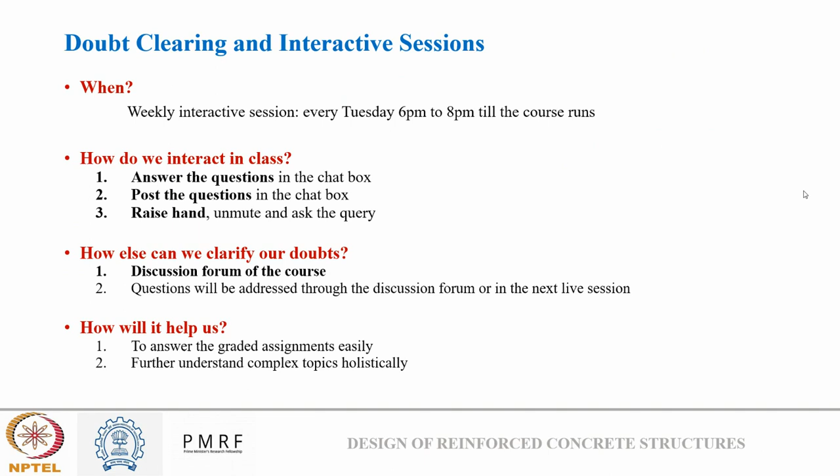Now, in today's session, we will first have a quick glance at what we discussed in the last live session, which was for week 3 of this course. Then we'll discuss week 4 content, starting with a quick overview of design of flanged sections, followed by a numerical on flanged sections. After that, we'll start our discussion on limit state of collapse in shear. We will first discuss the basics of flexure and shear failure, how stirrups are considered, and how designing of shear reinforcement is done. In today's class, we will see around 4 to 5 numericals, since that will provide you better clarity of applying the codal provisions. Finally, we will conclude the week.

So, in the last live session of mine, we first talked about limit state of collapse in flexure, where we discussed how a singly reinforced beam is designed. We looked at the stress versus strain plot, material behavior, derivation of relations, and one numerical.

We then talked about design versus analysis. Design is done when we know the external load and moment acting on a section, and we want to design the depth of section and the reinforcing area required. Analysis is done when we know all the parameters of a section and we want to calculate the moment capacity of the section.

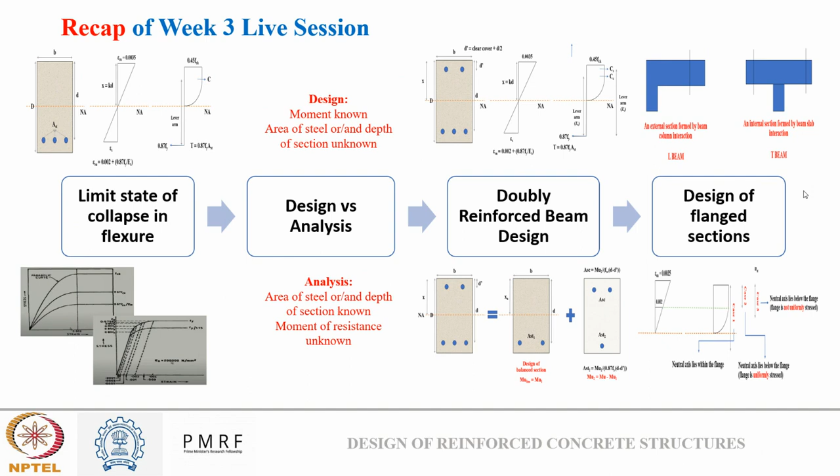Finally, we discussed flanged sections. What are those? What are the different cases in terms of design in flanged sections, and a general flow of design? So, just to recap before looking into a numerical: what are flanged sections? These are sections formed by a combination of two or more individual components. You can see in the first image it is an L beam formed due to the interaction of a column and a beam at the external joint. The second image shows a T beam formed due to the interaction of a slab and a beam.

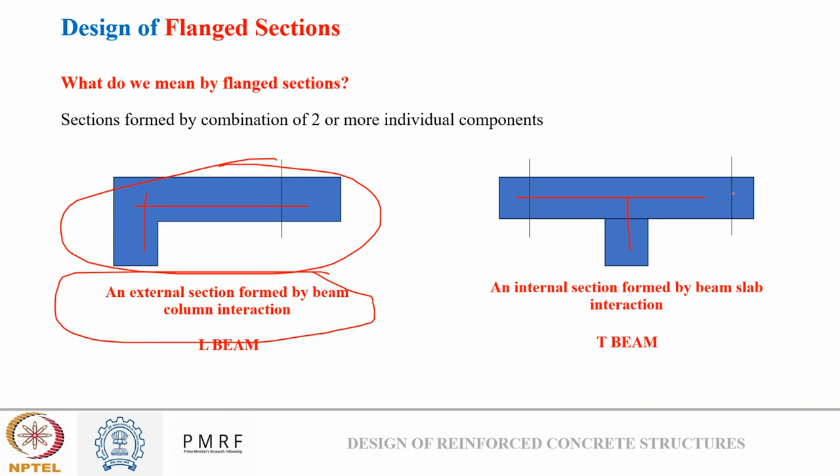Now, based on the stress block, flanged section design can be divided into three cases. Case 1, when the neutral axis lies within the flange. Case 2, when the neutral axis lies below the flange but the flange is uniformly stressed. And case 3, when the neutral axis lies below the flange and the flange is not uniformly stressed.

Now, how do we judge which of these cases we need to deal with? We get that judgment by getting the value of x, the depth of neutral axis, df, and d. Assuming Fe415 grade steel for now, we can calculate df by d value using the similar triangle property, and by clubbing everything together based on this df by d value and x value, we can judge which case we belong to.

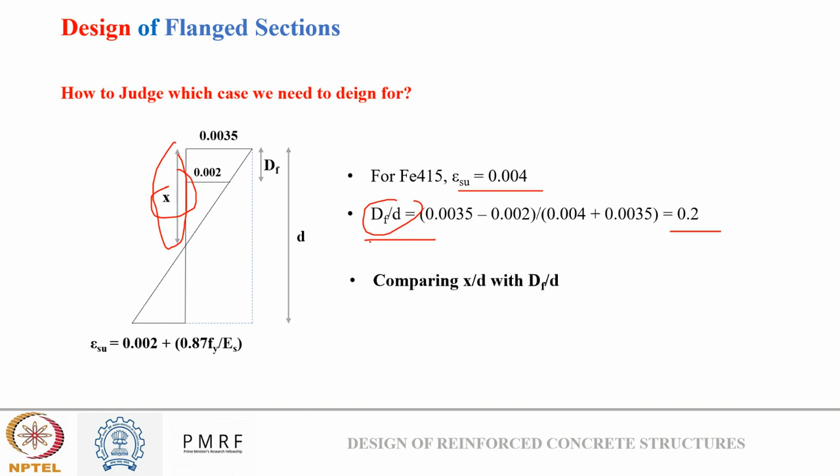So, just to club everything we discussed about flanged sections in the last session: how do we analyze? We first get the parameters that are generally given to us in the question about a flanged section. Now we calculate x by assuming tensile failure and equating the compression force and tensile force. We equate them and get the value of x. We compare x by df. So if x is less than df, it means the neutral axis is lying within the flange.

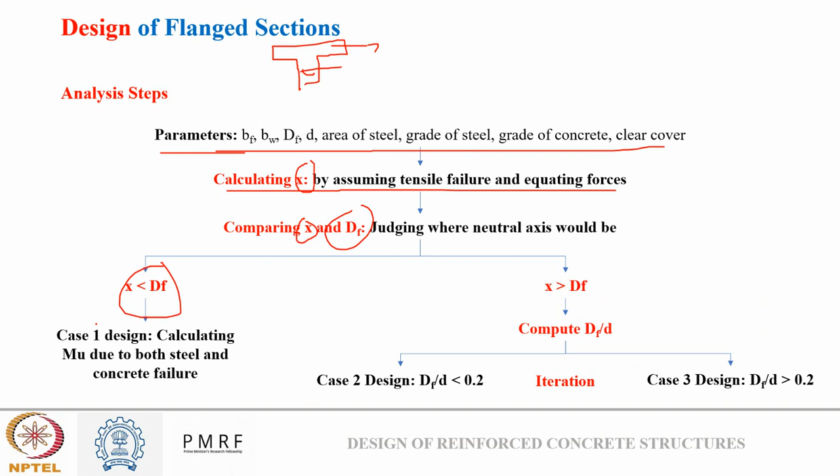So it is case one of design. I can calculate mu by considering both steel and concrete failure, and the lower value of which I will take as the limiting value.

If my x is greater than df, it means that my neutral axis is lying out of the flange. So I need to calculate the df by d value. If my df by d is less than 0.2, it means that my flange is uniformly stressed, so I will go on with case 2 of design that we saw last week. And if my df by d is greater than 0.2, I will go with case 3 of design, which we also saw last week.

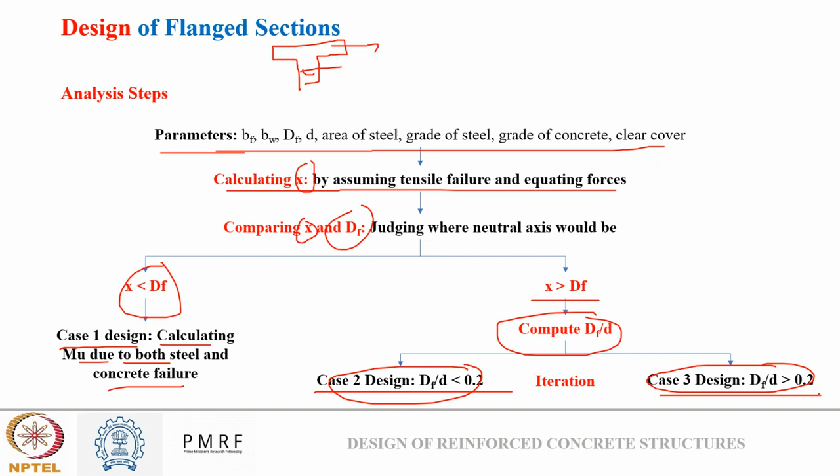Since it is now clear about how flange section is designed, we will look at one numerical. The figure shows a cross section of a continuous T beam. The cross section dimensions are fixed by considering hogging moment at support. The effective flange width BF is calculated as 1400. Determine the area of steel required to resist a sagging moment of 650 kilonewton meter at midspan. Assume moderate exposure condition. Grade of steel is Fe415.

I will wait for a couple of minutes for you guys to try to solve this problem on your own, and then I will discuss. You can see in this problem, some of the parameters are given to you, some are not. You need to see the additional information given, like moderate exposure conditions and everything. Sometimes you need to start with some assumptions when you don't know how to proceed. So try to solve, else we will discuss.

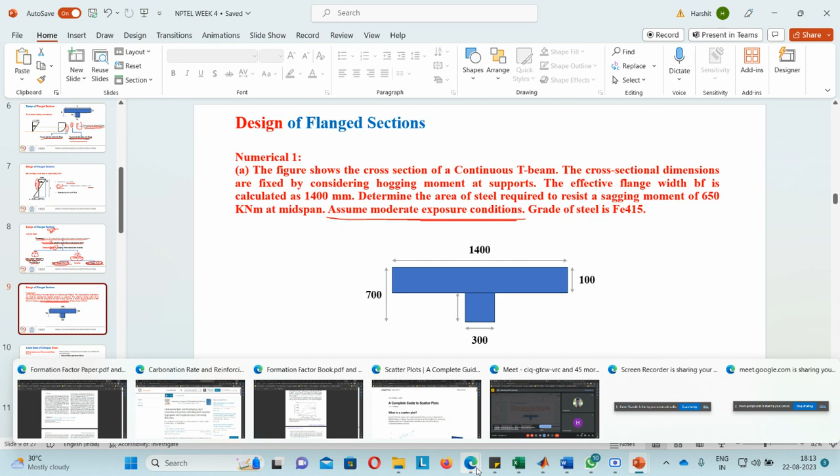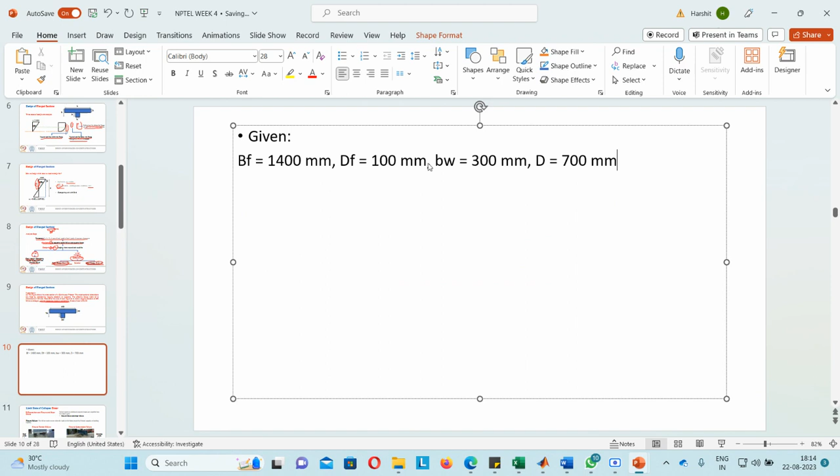Okay, so let's see the solution now. First, what all things are given? The given data includes: we know BF is 1400 mm, we know DF, depth of flange, is 100 mm, we know BW is 300 mm, and we know total depth D is 700 mm. And Mu, which is acting, is 650 kilonewton meter.

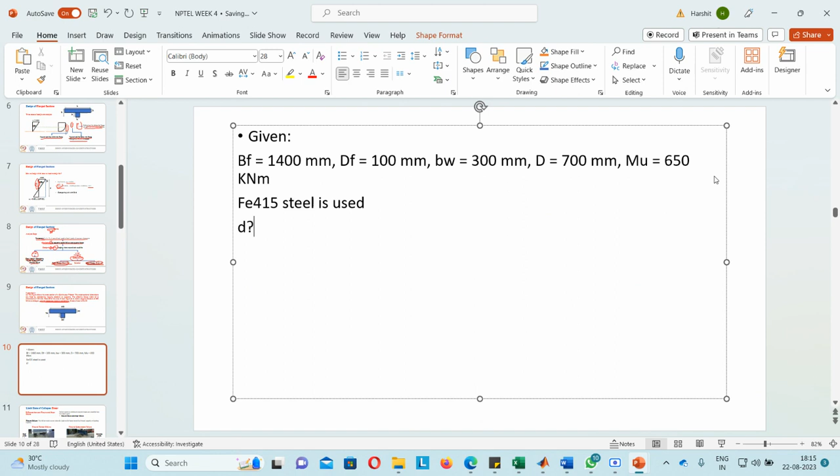So what is the first step? We also know Fe415 steel is used. Now what are the things that are missing to us right now? The value of small d effective that we need to calculate, and what is the grade of concrete. These two values are first that we need to determine.

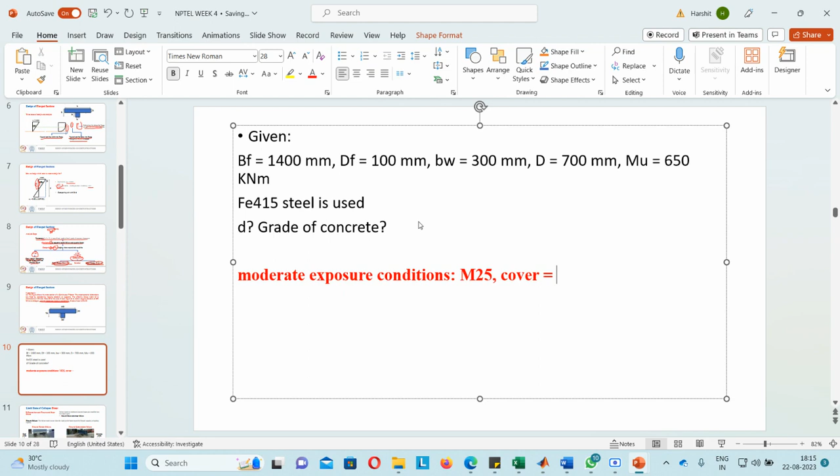Since it is given in the question that it is moderate exposure condition, if you look into IS 456, it says that for moderate exposure condition, minimum grade of concrete that needs to be used is M25 grade, and the cover should be more than 30 mm. So let's assume a clear cover of 40 mm in our case.

So if we now calculate D, small d will be 700 minus 40 minus, let's assume we will provide 20 mm dia rebars. So let's fix the diameter of the rebars also that we will provide. Our effective depth will come out to be 650 mm.

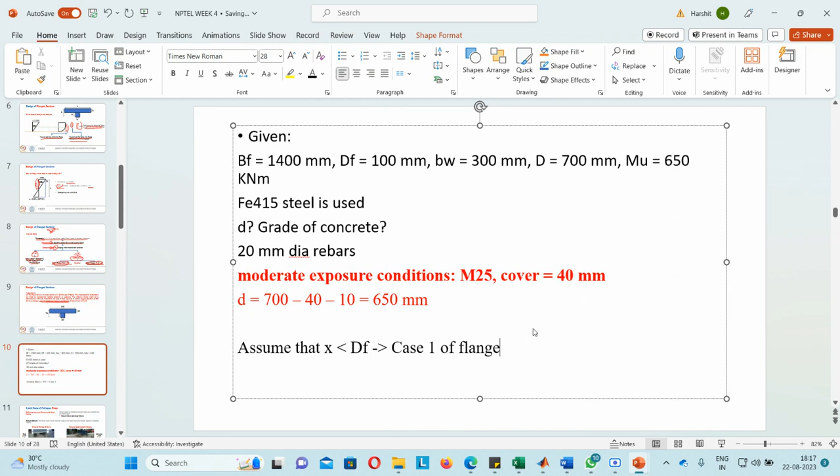Now how will we proceed? Let's assume that our neutral axis, let's assume that x is less than df. Since we don't know which case we belong to right now, we need to start with an assumption. So let's assume that our x is less than df. This means that we are belonging to case 1 of design. Case 1 of flange section design. Now how to solve this?

So we know the formula Mu is equal to 0.36 fck times x times d minus 0.42x, times bf. We know the value of bf, we know the value of fck, we know the value of d, and we know the value of mu. So we can calculate the value of x.

Now if this calculated x comes out to be less than df, then this means that our assumption is true and we can proceed ahead with the calculation. If x comes out to be more than df, then this means that the numerical doesn't belong to case 1 of design, and we need to check for case 2 and case 3. So just substitute the value.

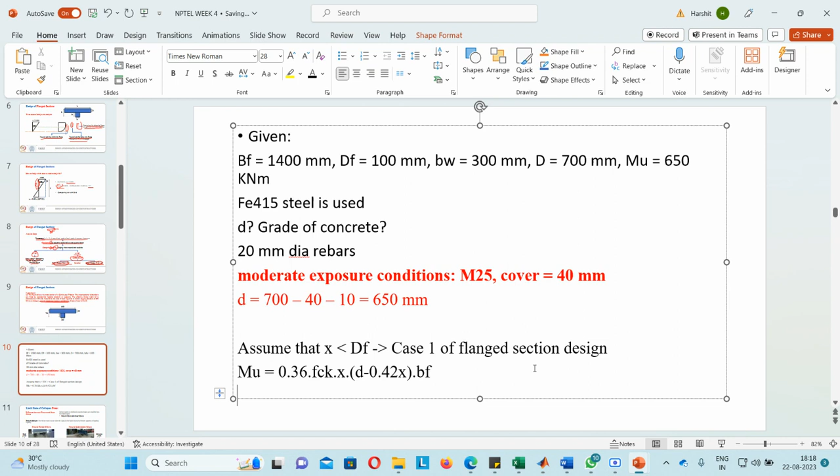So 650 into 10 to the power 6 is equal to 0.36 into 25 into x into 650 minus 0.42x, into 1400. So just try to solve this.

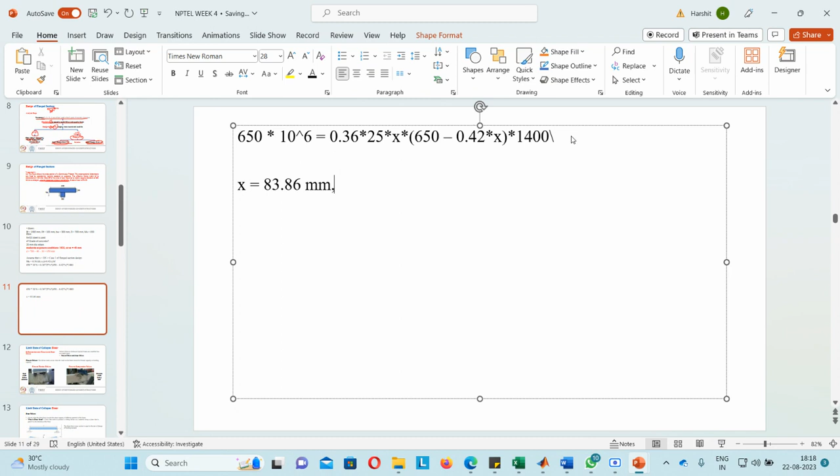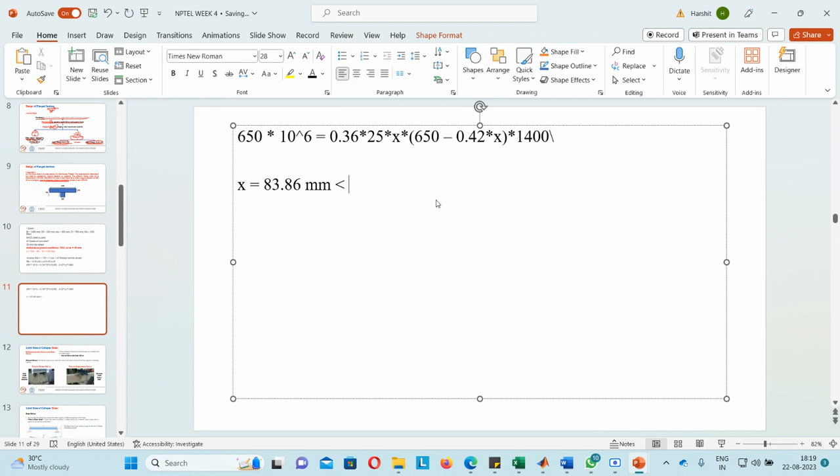Now since I know the value of x, I can use the direct relationship: x by d is equal to 0.87 Fy AST upon 0.36 FCK bf. Now here we know x, we know d, we know Fy, we know FCK, we know bf. So AST can be calculated easily. Just substitute the value and you will get AST equal to...

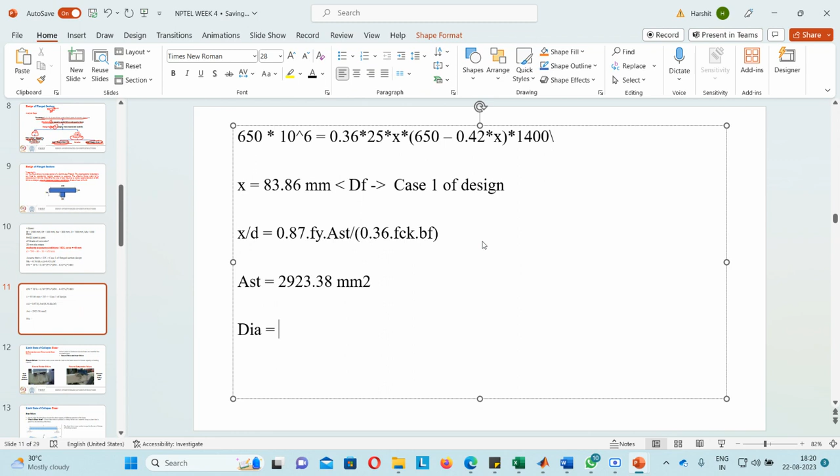2923.38 mm square. Now we assumed diameter of 20 mm, so the number of rebars required will be total area AST upon area of one reinforcement, area of one rebar. When you do this division, you will get around 9.31. So we can round it up to 10 number of rebars. So the total area that we will be providing will be more than sufficient. This is how we solve this question.

So we have determined the area of steel required and the number of rebars that we need to provide.

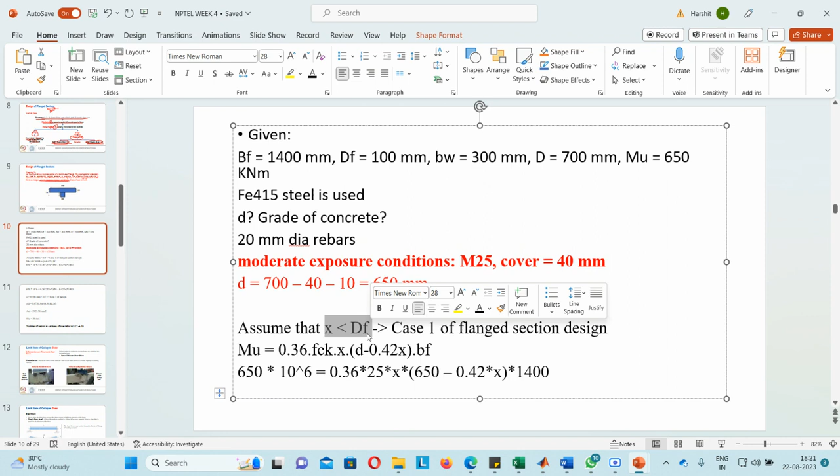So what we did first: for moderate exposure condition, we estimated what grade of concrete and cover we need to go for. Then we calculated the effective depth. Once we calculated the effective depth, we assumed that our neutral axis is lying within the flange. So for using that, we calculated the depth of neutral axis. We observed that the depth of neutral axis is actually lying within the flange, so our assumption is true.

So once our assumption is true, by equating the forces, we calculated the area of steel required. And since we know the diameter of rebar that we are going to provide, we calculated the number of rebars. So this is how design of flange section is done.

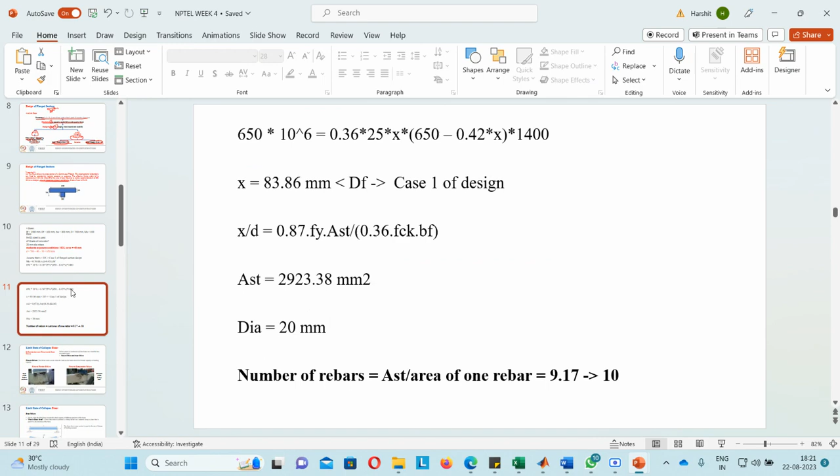Okay, so let's proceed ahead now. Till now we have talked about limit state of method. In limit state of method, till now we have talked about flexural failure. Now we will talk about another kind of failure that is known as shear failure.

So, in reinforced concrete, failure can be classified into two types: flexural failure and shear failure. Flexural failure occurs when the load on a beam or any cross section exceeds the flexural capacity, or bending capacity, of the section. This kind of failure can be further classified into two types.

Now the second form of failure is failure due to shearing force, which occurs when the shear force exceeds the shear capacity of different materials of the beam. Now, what is shear force? A shear force is a force that tends to produce a sliding failure on the material along the plane that is parallel to the direction of force.

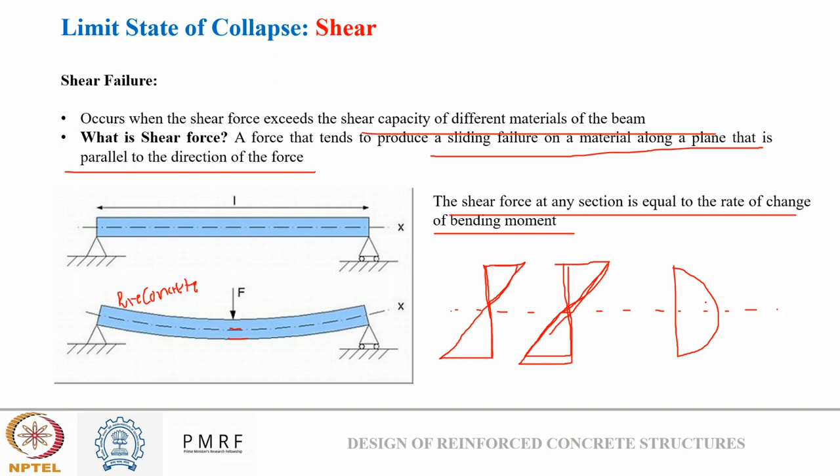So what happens when the shear stress acting on the material exceeds the shear strength? There can be three kinds of failure. Now, what are these three failures?

First is the diagonal tension failure, where the crack will first initiate from the tension zone and slowly propagate up to the compression part. This is a kind of development of vertical crack at the bottom due to tensile stresses.

Second kind of failure can be termed as diagonal compression failure, where there will be crushing of concrete at the tip of the diagonal crack around the area of point of load application.

Third is true shear failure, which happens near the support, where diagonal stresses develop due to the transfer of load near the support and at the point of load application. So these are the three cases in which shear failure can happen.

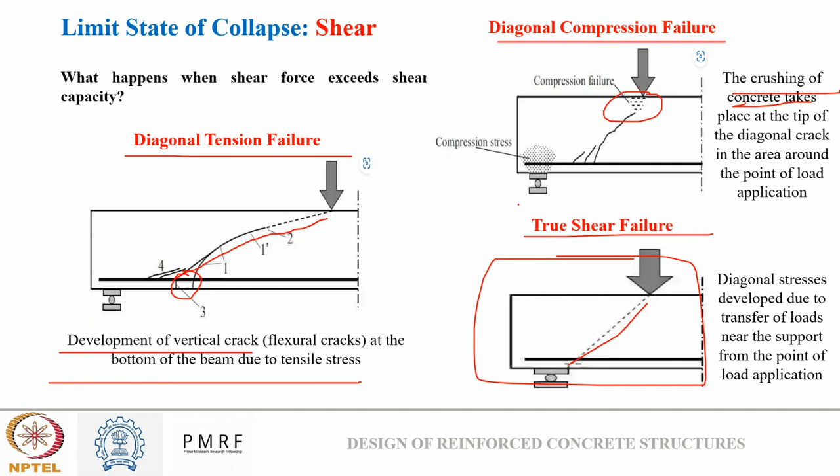Now, how to mitigate these failures? By providing reinforcement which can arrest these diagonal crackings, and this is done by using stirrups.

These can also be placed into three different types. We have vertical stirrups, which can be single legged, double legged, four legged, and six legged. Basically, these are the stirrups that will be resisting the diagonal cracking.

Why am I saying two legs? Because there are two stirrups here which can resist the diagonal cracking. Similarly, here there are six stirrups to resist the diagonal cracking, and here there are four stirrups to resist the diagonal cracking.

Vertical stirrups run perpendicular to the longitudinal reinforcement, having two functions. First is to hold the longitudinal rebar in position, and second is to arrest the shear by opposite steel members. So these are the opposite steel members by which it can arrest the shear.

So this is the first form of shear reinforcement. Second can be by providing inclined stirrups, which also help resist the cracks.

Third form is by bending the longitudinal rebar near the edges, which also resists the cracking that is happening. Now this is the least preferred way of all three cases, because it is not very easy to bend rebars and use them. That's why it is the least desirable case.

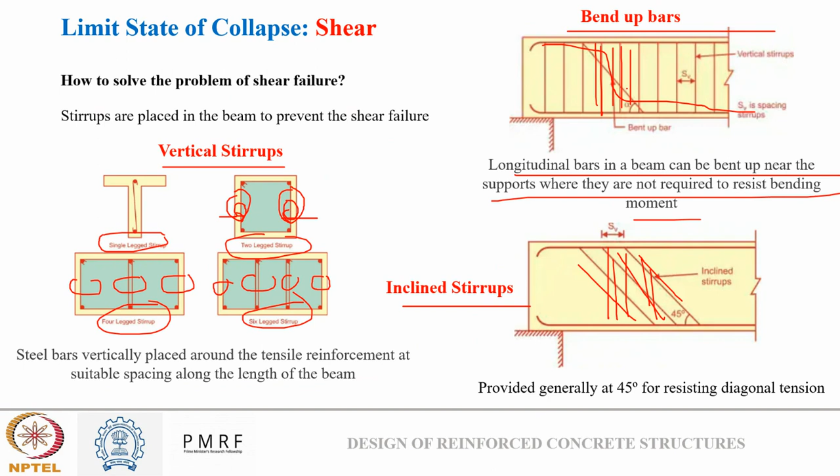Now how do we design these stirrups? For that we need to look at the stress diagram first. We said that the shear force at any section is equal to the rate of change of bending moment, which is what we started with.

Now for plain concrete, this is how normally the stress will vary. Since the bending moment is minimum at the neutral axis and maximum at the edges, my profile will look like this.

But in case of reinforced concrete, what will happen? My stress profile is something like this. Here my bending moment is maximum, here it is zero. Here we say that no stress is acting; all the stress is taken up by the reinforcement only.

So my shear profile for this case will look like this: it will increase till the neutral axis and stay constant after that. So for reinforced concrete, my shear profile looks like this.

Now, since it is difficult to solve such a complex stress-strain diagram for the shear profile, what the IS code does is say that we can go ahead by designing for nominal shear stress. So how is this nominal shear stress given?

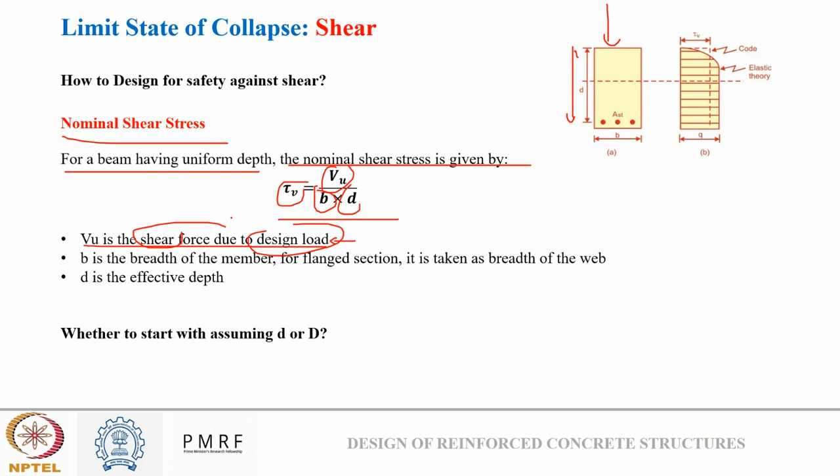For a beam having uniform depth, nominal shear stress is given by the formula: tau v equals Vu upon b into d, where Vu is the shear force acting due to design load. We know some loading acting on a section, and from that load we can calculate the shear force. B is the breadth of the member.

For flange section, it is taken as the breadth of the web, and D is the effective depth. Now sometimes we don't know the value of D, so how to start - whether we should assume capital D or small d? It is always preferred to assume capital D, because in the end we need to design for the total depth only. So assume some whole number of capital D, assume a cover, assume a rebar diameter, and calculate small d. If your small d comes out to be a value like 655 or 650, it won't be a problem, because it is just required for designing. But for actual construction we need capital D only. So it is always preferred to go with capital D before, if it is not given in the question.

So now this is the shear stress that is acting due to external load. Here we calculated tau v. Tau v was the shear stress which was acting due to external load.

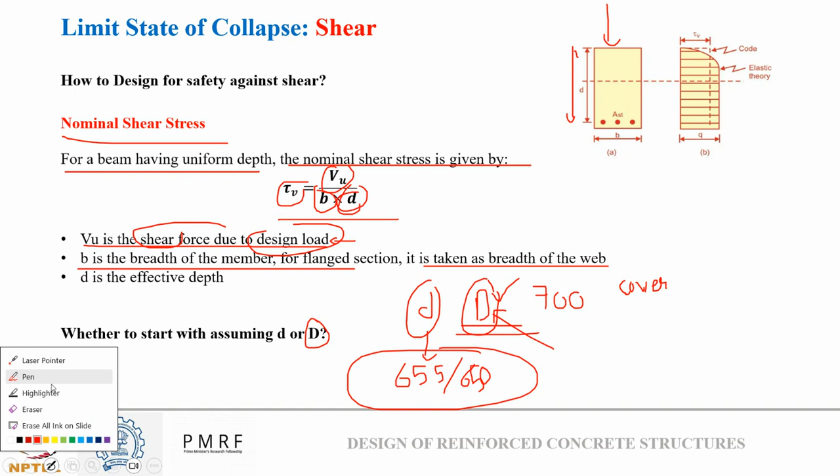Now, what is the shear strength of reinforced concrete? The shear force exerted due to external load can be resisted by a combination of both steel and concrete. So in flexural failure, we saw that the tensile stress can be resisted only by steel, and the compression stress is resisted by concrete. But when we talk about shear failure, the shear force exerted by the external load can be resisted by a combination of both steel and concrete.

So, in order to design stirrups as shear reinforcement, we first need to know the shear strength of concrete - how much concrete will resist. If we know the shear strength of concrete, say Vc, we can calculate how much shear strength the steel needs to resist. And if we know that, we can design for the required number of stirrups.

So now, how does concrete resist shear? Concrete can resist shear in three ways: due to its uncracked section, due to aggregate interlocking, and due to dowel action of longitudinal reinforcement. Now separately calculating all these three things is difficult. So what IS code says is, if we know the area of tensile reinforcement provided for flexural failure, and we know the grade of concrete, we can directly compute the shear strength of concrete by following Table 19 present in IS 456.

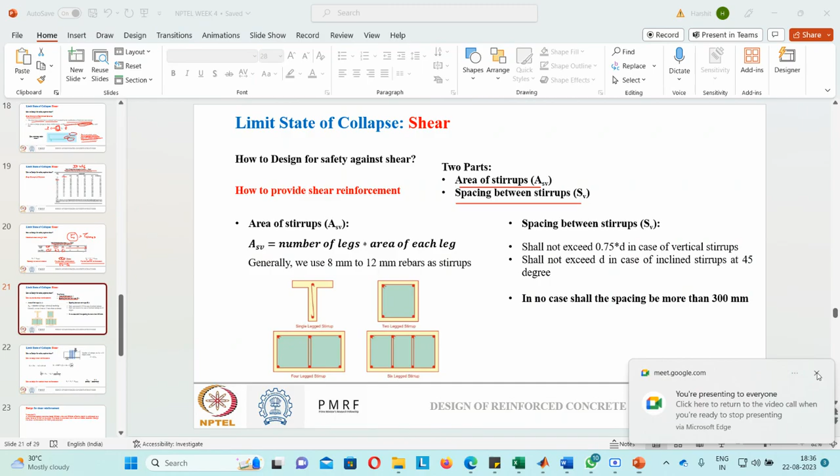So where was I? So when we are providing shear reinforcement, there are two parts: the area of stirrups required and the spacing between the stirrups. Our area of stirrups will be estimated by calculating how many legs we have in our stirrup and the area of each leg.

Generally for shear reinforcement we use 8mm to 12mm rebars for stirrups. So suppose I am going with a two-leg stirrup, then my total area of one stirrup becomes two times the area of each leg, so 2 times pi r square. Similarly we can go with 4 leg, 6 leg respectively. This is how I get the area of one stirrup.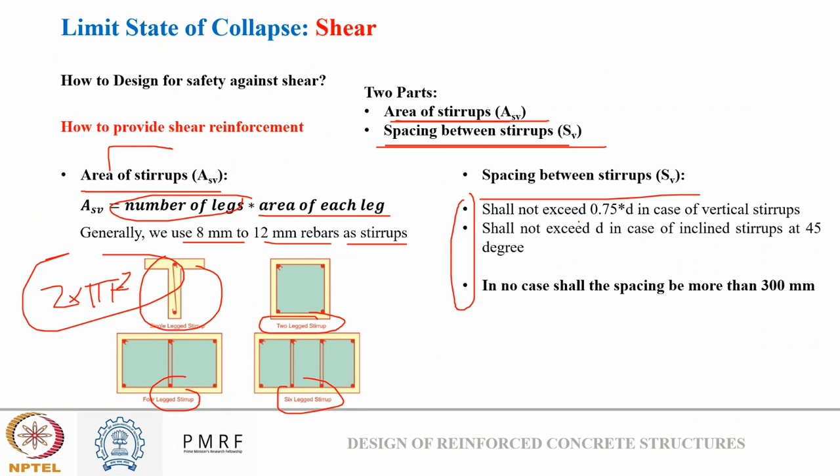Now what will be the spacing between the stirrups? We'll see how we calculate that spacing. There's a clause present in the IS code: the spacing between the stirrups should not exceed 0.75 times d, and should also not exceed 300mm. These clauses we need to check whenever we are designing for shear reinforcement.

Now how do we calculate the area of stirrups required? We know how much shear the steel needs to resist by calculating the shear force that needs to be resisted by the steel. This is tau s times bd, so we get the shear force that the steel needs to resist.

Now this shear force can be equated with 0.87 Fy ASV times d over SV. How did we get this formula? This is the load capacity of our steel, this is the area of steel, and d by SV is so that we can know how many stirrups are cutting a crack.

So how do we calculate the number of stirrups cutting a crack? We calculate it using d, the depth, and sv, the spacing between the stirrups. To calculate the number of stirrups required along this depth, since this is 45 degrees, we generally assume the cracking to happen at 45 degrees, this will also be d. So the number of stirrups required at spacing sv we get simply by d by sv.

So now we know vs, we know everything. Area of a single stirrup we know, so we can calculate sv or asv, both we can calculate. ASV is the area of a single stirrup that we can fix based on what kind of stirrup we are providing, and we just need to calculate SV, the spacing between the stirrups.

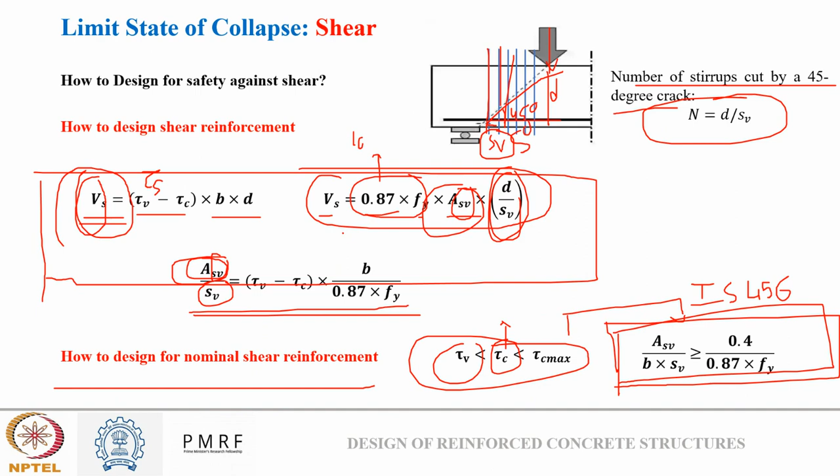Yeah, sir, previous slide, if tau v is greater than tau c max, it could also be tau v greater than tau c max — do we need to redesign the structural elements?

Yeah, if my... okay this will be greater. Previous slide sir, yes that one. Huh, yes sir, I think we have to redesign the section, no?

Redesign the section means you need to redesign for AST, the area of steel provided in tension reinforcement, or the depth of the section. All these things you need to redesign until your tau v becomes less than tau c max.

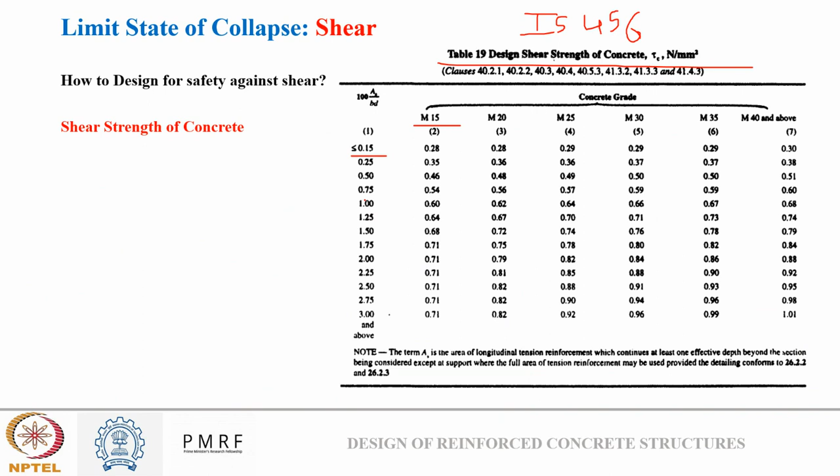And what is the shear capacity of a beam? Shear capacity of a beam is given by this only. Shear capacity of beam, we generally mean how much shear a beam can resist. So for a reinforced concrete beam, both steel and concrete can provide some shear resistance. So right now what we are doing, we are trying to calculate how we can calculate the shear resistance that is offered by concrete and how much stirrups we need to provide for resisting the external shear that is acting.

When we will see the numerical now, the things will get more clear. So just look at this numerical first now. This numerical says a reinforced cement concrete beam 300 wide and 500 effective depth is subjected to a shear force of 40 kilonewton at the ends. The beam is provided with three rebars of 20 as longitudinal reinforcement. So using this you can calculate AST. Design the shear reinforcement for M20 grade concrete. Try to solve this problem.

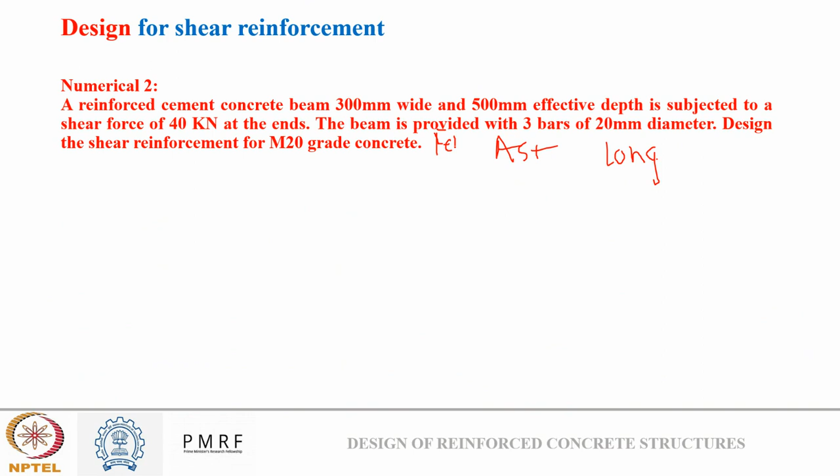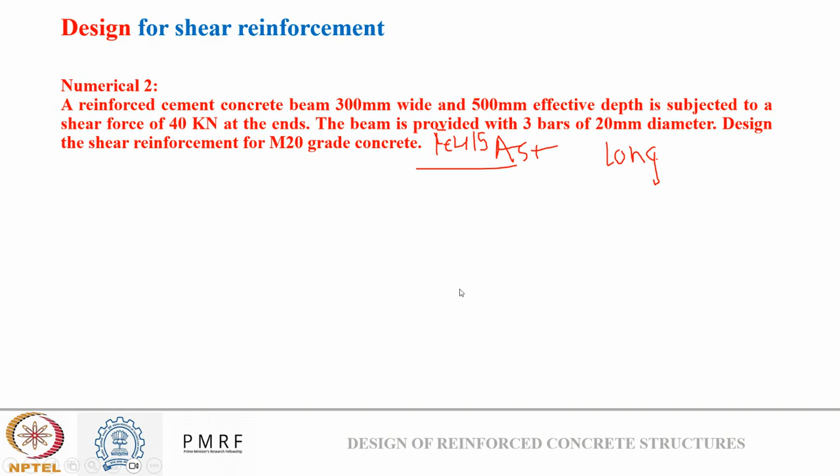Assume Fe415 grade. When the grade of steel is not given, you can always assume Fe415. I will mute myself for few minutes so that you can solve.

Okay, so let's see the solution now. First of all, what all things are given in the question? So we know width of the beam is 300 mm. Second, we know effective depth, it is 500 mm. Shear force that is acting due to external load, VU, it is 40 kilonewton.

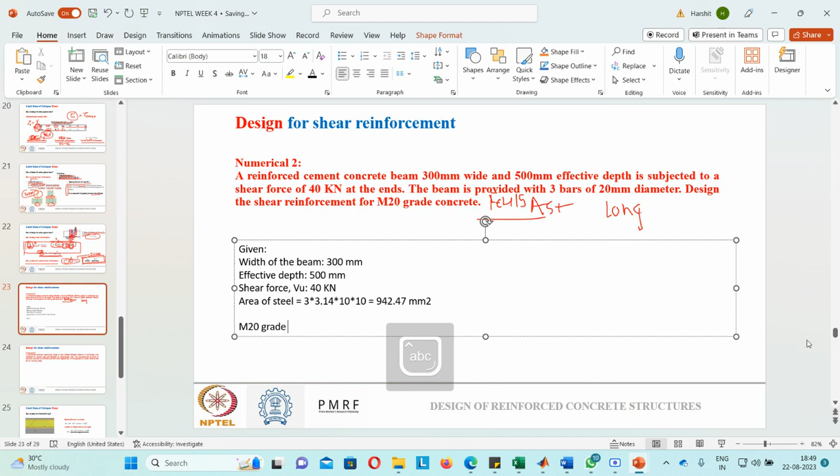And we also know the area of steel. So what is the area of steel? 3 into pi r square, 3.14 into 10 into 10. So if I will calculate, it will come out to be 942.47 mm square. We also know we have provided M20 grade concrete and Fe415 steel. And we need to determine the design for shear reinforcement.

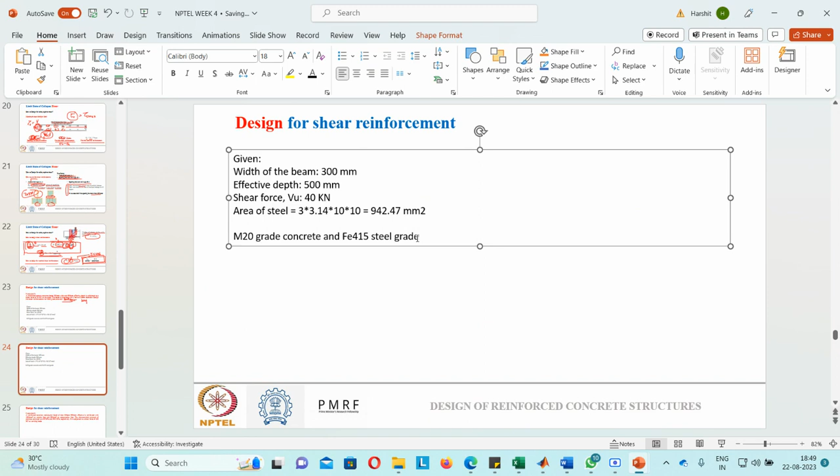So what will be the first step? So first step will be... okay, so I am removing this part now. So my step one will be to determine the nominal shear stress. Since we know the shear force that is acting, we can calculate the nominal shear stress. How to calculate? Tau V is equal to Vu upon bd. So it will be 40 into 1000 divided by 300 into 500. Just do the calculation. So it will come out to be 0.26 Newton per mm square. This is my tau v.

Now first is to check with tau c max whether we need to redesign the section or not. How will we estimate tau c max? We know grade of concrete is M20. So from this table we can see tau c max value is 2.8 Newton per mm square. So my tau c max is 2.8 Newton per mm square. Since my tau v is less than tau c max, we are safe to go ahead.

But before moving ahead, we also need tau c. So this is what we need to calculate first. How we can calculate? By using table 19 of IS 456. So for this, what we need, we know the grade of concrete M20. We need to calculate the percentage of steel reinforcement that is provided. So how much? What is the percentage of steel?

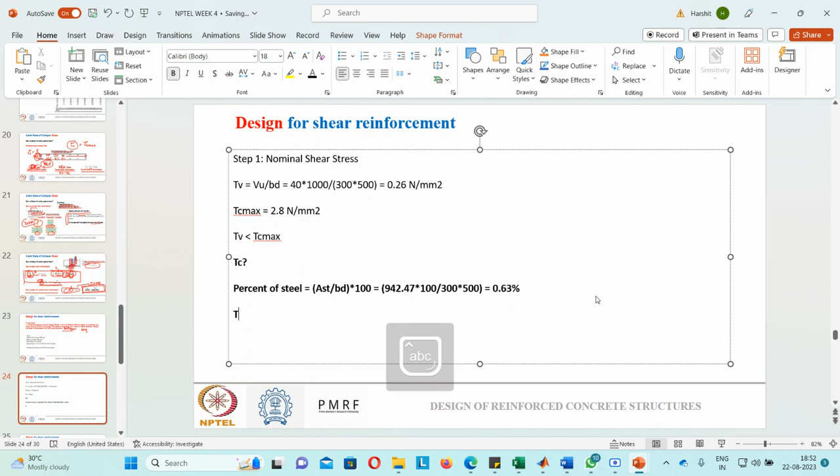So how we can calculate? Just simple, y minus y1 is equal to y2 minus y1 upon x2 minus x1 into x minus x1. This is simple mathematics that you can use. So tau c will come out to be 0.48, which was for 0.5 percentage of steel, and 0.56 was for 0.75% of steel. So it is 0.56 minus 0.48 upon 0.75 minus 0.5 whole into, how much percentage of steel we got, 0.63 minus 0.5. I hope everyone is clear with linear interpolation, basic mathematics.

So upon solving this, let me solve.

Sir, one question. Can we apply the multiplying factor to design load, like 1.5? Here design load was not given to us, directly it is given as shear force.

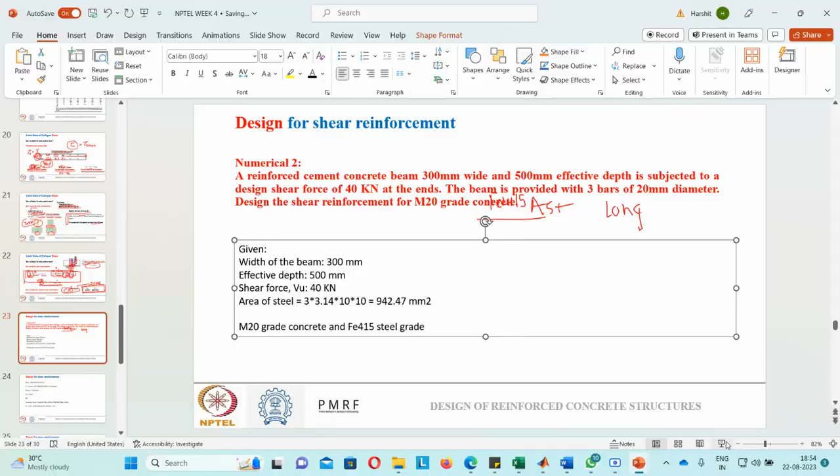So if the question directly gives design shear force, should we still multiply? If it's given right now, you can assume this as the design shear force only. But generally, when you need to multiply by that factor of 1.5, it is the load factor, not the force factor. Suppose you're given some working load, say 40 kilonewton per meter, acting on the beam — in such cases you need to multiply by the load factor, 1.5. That is load factor, not force factor. So when shear force is given, assume it as the design shear force only.

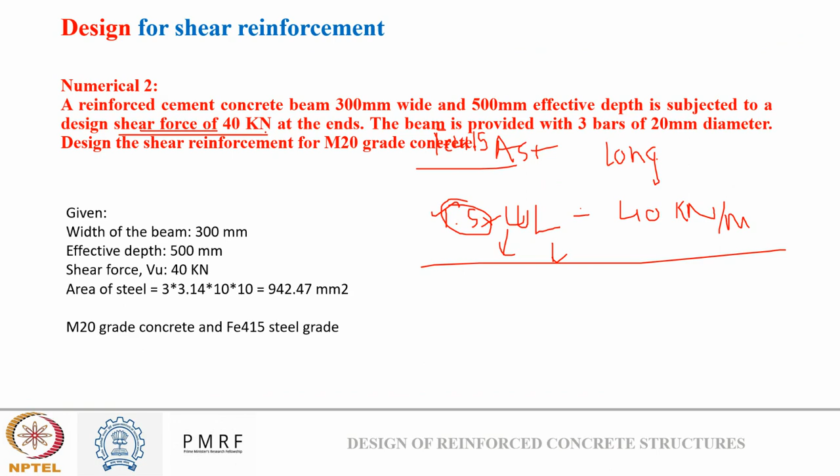Okay sir. So this calculation will come out to be 0.52 Newton per mm square. Now just compare these two values: Tau c is 0.52 and Tau v is 0.26. So my Tau v is less than Tau c max and it is less than Tau c also. So which case do we belong to? We belong to case 3 that we saw. My Tau v is less than Tau c and less than Tau c max.

So since my shear strength of concrete is enough to resist the design shear force, the shear stress acting due to external load, I should not provide any additional reinforcement. But as code says, we need to provide minimum reinforcement. So this is the case 3 that you guys were asking about. So we need to provide minimum shear reinforcement.

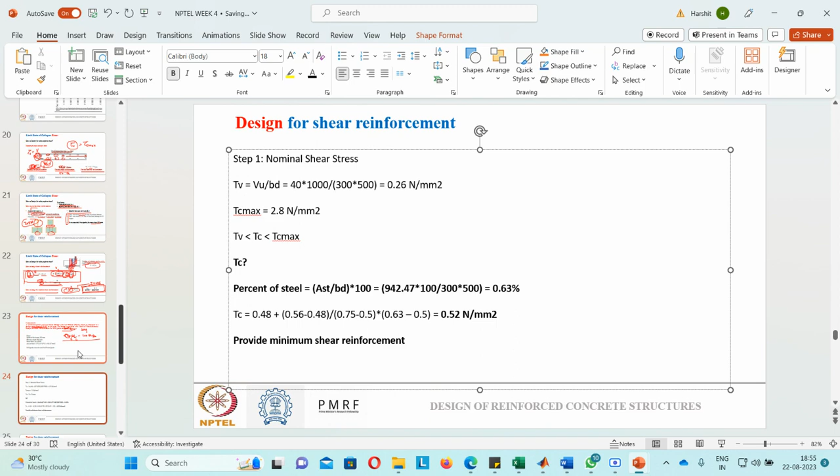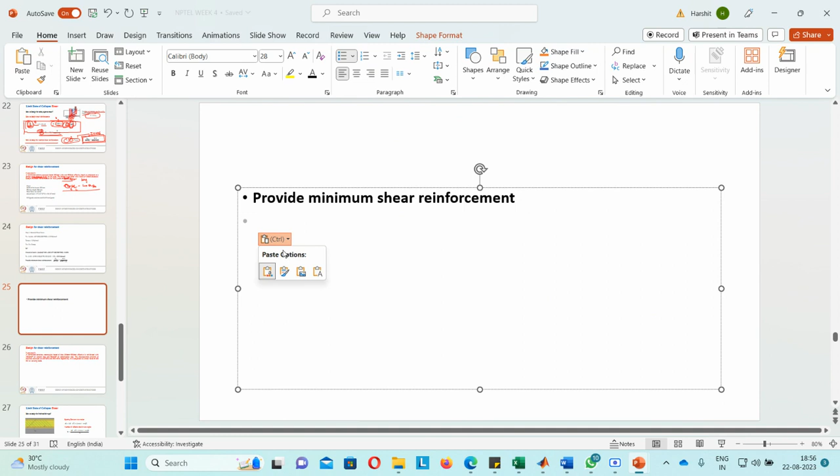How do we do that? By following this formula. Let me copy it here. So by following this formula, now how can I do this? Let me take one more slide. So we need to provide minimum shear reinforcement, and we know this formula. So how to proceed now? What we will do is assume first.

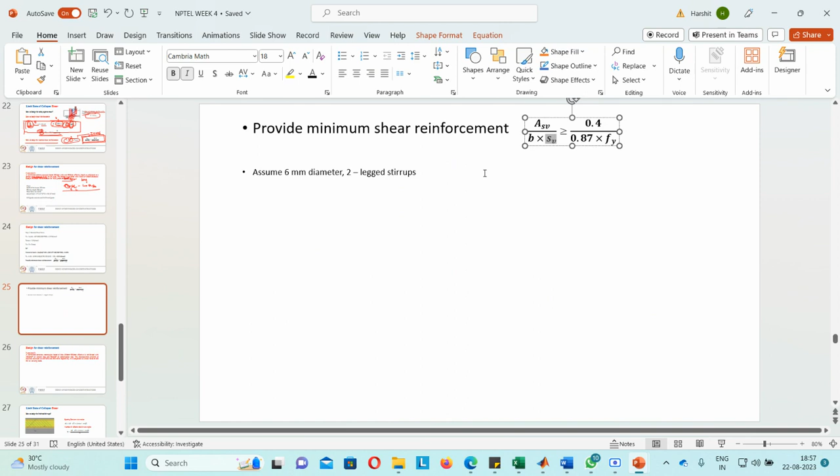Let's assume we are providing 6 mm diameter, 2 leg stirrups. This is something you need to fix — either Asv or Sv, both you can't estimate from a single formula. So you need to fix one value so that you can estimate the other. I always fix Asv first, because for Sv you have codal guidelines saying it should not be more than this or less than this. So let's fix the area of stirrups. How can we calculate Asv now?

Asv is nothing but 2 times 3.14 into r square into... So my Asv will come out to be 56.54 mm square. Now we know Asv, we know value of b, and we know Fy. So my Sv can be calculated as Sv equals 0.4 into... it will be 0.87 times Fy, which is 415 times...

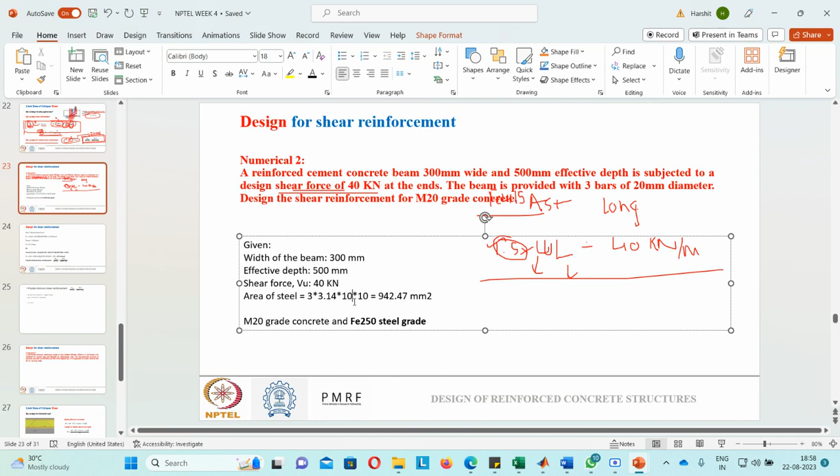One more thing — generally when we talk about stirrups, we don't go for Fe415, we generally assume Fe250 grade steel. We could right now design for Fe415, but generally Fe250 is used for stirrups because we don't require that much strength in stirrups. So let me correct that — let's use Fe250 grade steel for stirrups, as this is what is generally used.

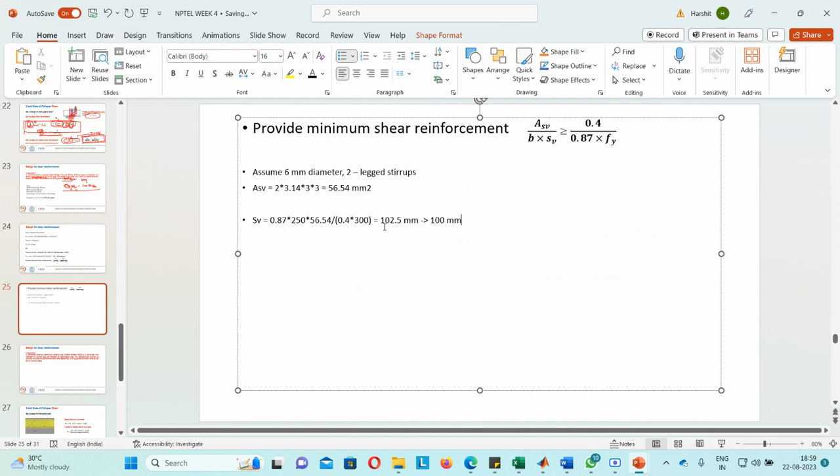So 0.87 times 250 times 56.54, divided by 0.4 into 300. Upon solving this, you will get around 102.5 mm, which we can round up to 100 mm. Why? Because it is practically not possible to provide 102.5 mm spacing, so let's round it up to 100 mm.

Now what we need to do is check for spacing guidelines as per IS 456. IS 456 says there are two conditions: 0.75D and 300 mm — it should not exceed 300 mm. So 100 mm is less than 300 mm, and 0.75D will be 0.75 times 500, which is 375. So this value is safe to go with.

So the final comment will be: provide 6 mm diameter, two legged stirrups at the rate of 100 mm center to center. So this is how we state the final conclusion. This is the solution.

Everyone clear with the solution? If yes, let's proceed on to one more question.

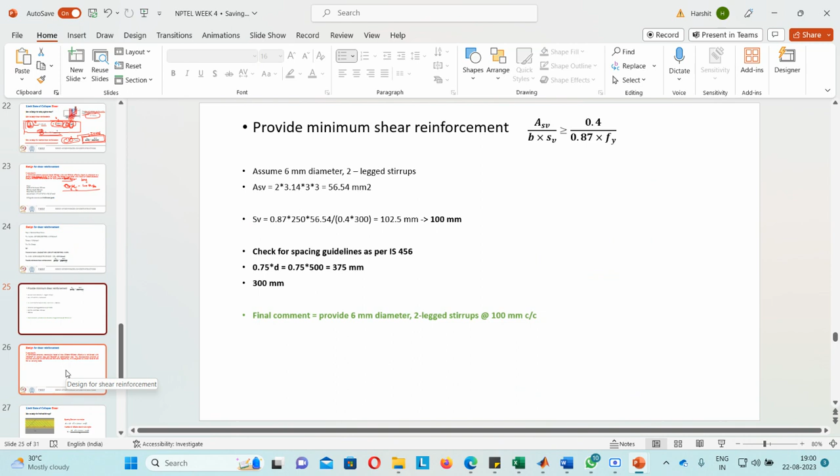This numerical says a reinforced concrete rectangular beam of size 300 mm by 500 mm is reinforced with 1500 mm square steel on tension face and 500 mm square steel on compression face. So this is a case of doubly reinforced beam. The characteristic strengths of concrete and steel are 25 MPa and 500 MPa respectively.

It is subjected to a shear force of 200 kilonewton at working load. Since shear force is given directly, you don't need to multiply with any factor. So now we need to design this for shear reinforcement. Try to solve it on your own.

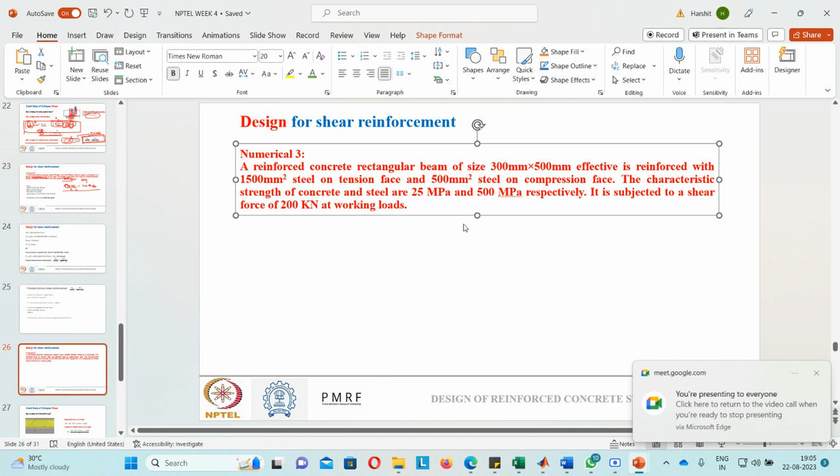We know the size of the beam. Small b is 300 mm. Since 500 is given as effective, we can assume that is small d only. AST is given as 1500 mm square and ASC is given as 500 mm square, and we know it's M25 grade concrete

and Fe 500 grade steel, and it is subjected to a shear force of 200 at working load. My bad, about what I said at the start of the numerical - since the shear force is 200 kilonewton at working load, we know our design load is load factor times working load.

Someone asked me in the previous question whether we need to multiply by load factor or not. When the question states a value is given at working load, we need to multiply the load factor to the shear force. But in the previous question, the shear force of 40 kilonewton had nothing mentioned about working load, so we assumed it was already the design shear force.

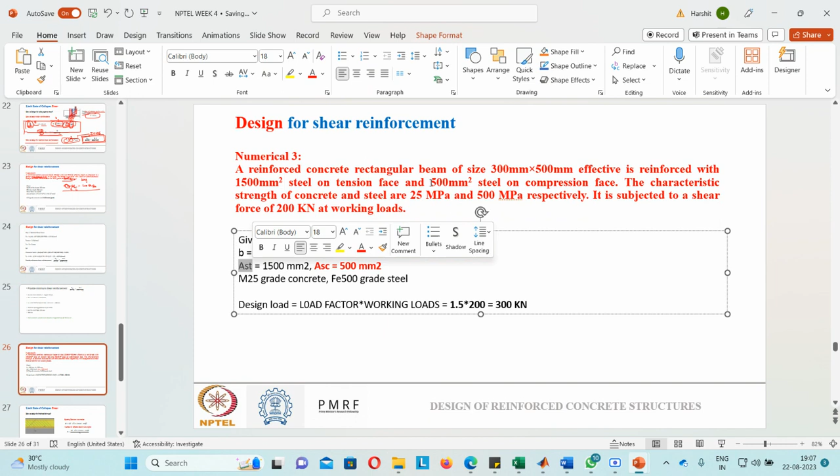Now this is what is given to us. The ASC part is of no use for us, because when designing for shear reinforcement, everything that matters is the AST part. So ASC is just given to confuse us - it doesn't add any value to our question right now.

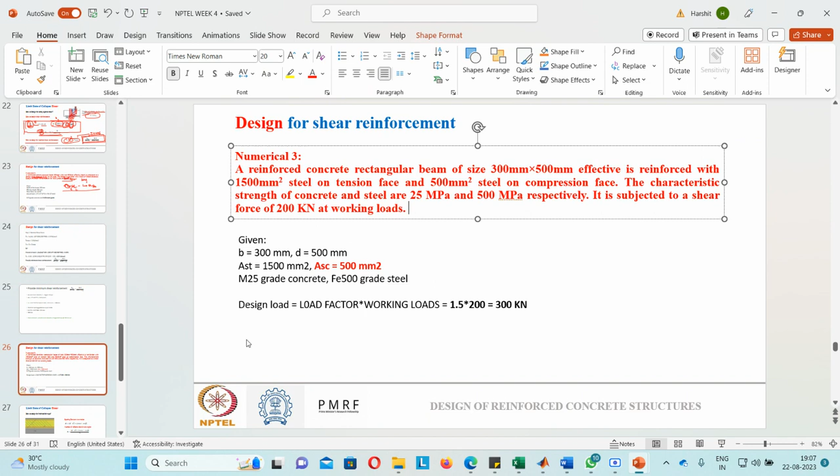So we will start with the solution now. The problem is very clear - you know B, you know D, you know AST, grade of concrete, design shear force, and grade of steel.

So what we'll do is first calculate tau C max, since we know the grade of concrete. We'll calculate tau V, then calculate tau C, and check which case we belong to - whether we need shear reinforcement or not. If we don't need it, we'll provide the minimum shear reinforcement. If we do need it, we will design for the shear reinforcement required.

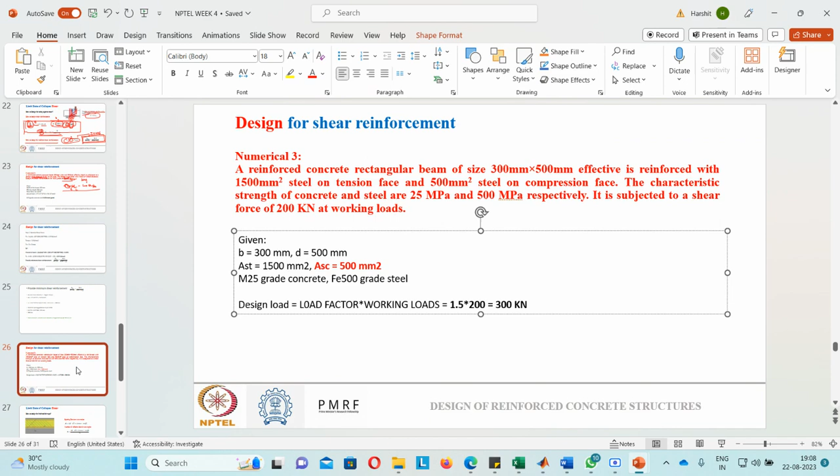Okay, so let's add a new slide now and solve ahead. First we will calculate...

We know VU, so we calculate tau V as VU upon BD. It will come out to be 300 into 1000 divided by 300 into 500, so it comes out to be 2 Newton per mm square.

Now tau C max for M25 grade, if we go back, is 3.1. So it is below the limit, meaning we don't need to redesign the section right now.

Now I need to calculate tau C, so I calculate percentage area of steel. Percent of steel is nothing but AST upon BD into 100. So it will come out to be 1500 divided by 300 into 500, whole into 100. This value comes out to be 1% only.

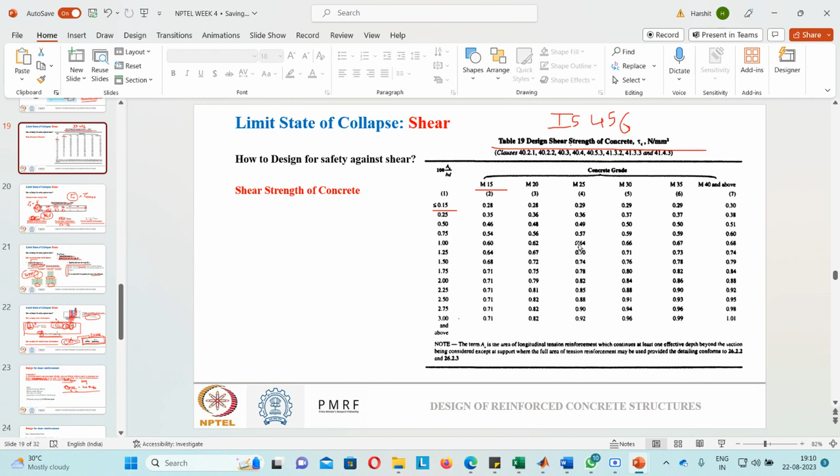So for 1% steel and M25 grade concrete, if we look in this table, my tau C value is 0.64 Newton per mm square.

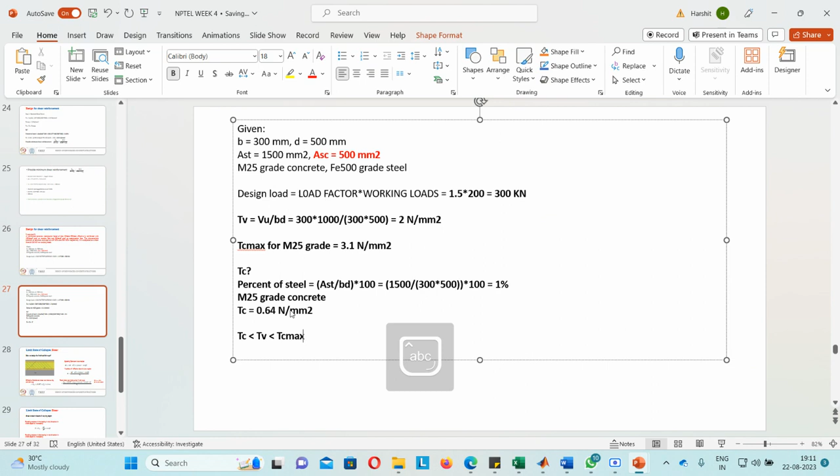So in this case, my tau C is less than tau V, which is less than tau C max. So now we need to provide shear reinforcement, by calculating using this formula. First we'll estimate VUS.

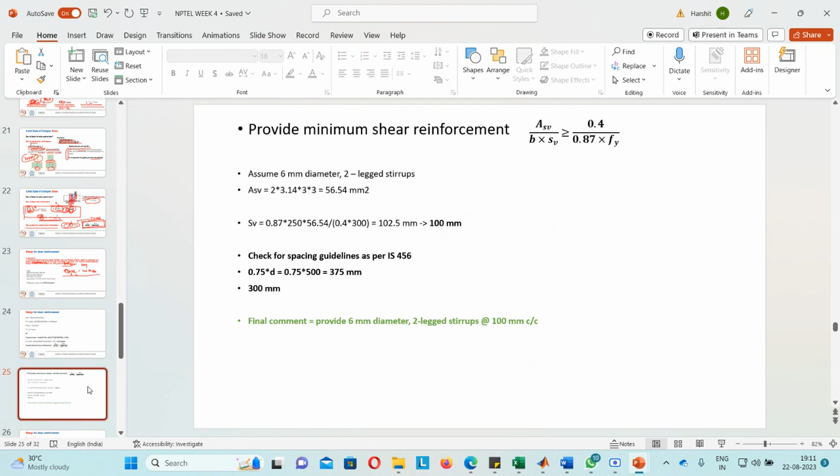So how will we calculate this? This will be nothing but 2 minus 0.64 times 300 times 500. So it will come out to be 204 kilonewton.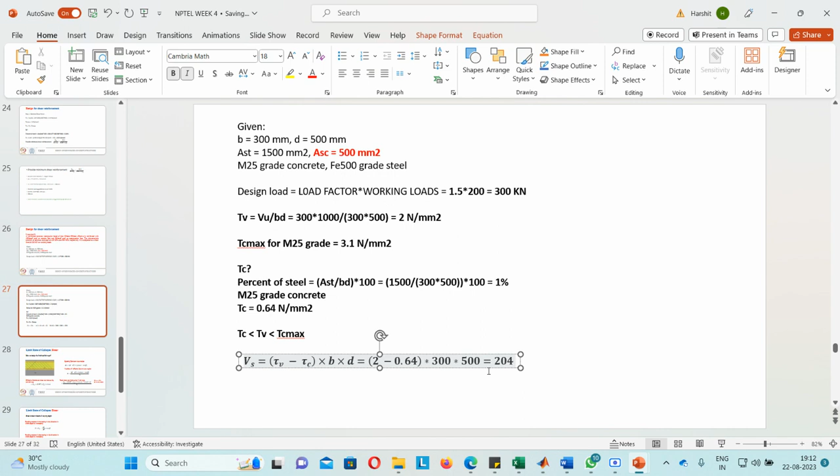Okay, my VS will come out to be this, and I need to equate my VS to 0.87 Fy ASV D upon SV. So let's assume we are providing 8 mm diameter 2 leg stirrups this time. So we can calculate ASV, and once we calculate ASV, we can calculate SV.

I'm just writing the final solution since we need to see a lot, a couple of more numericals, and we won't have time. So upon solving, you will get SV equal to 107.4 mm. You can round up to 110 mm or even 150 mm. Just round up to a higher value always.

Now when you check this value with the criteria of 0.75 D and 300, it will be lower than those two values only, so you will see that this is safe to go with. So finally you will say we need to provide 8 mm diameter 2 leg stirrup at the spacing of 150 mm center to center. Clear with the solution?

If no doubts, I will proceed ahead now. So let's see the next part now.

So now we discussed earlier that there can be inclined stirrups also. Suppose a crack is running diagonally at an angle beta, and I need to provide inclined stirrups at an angle alpha. This is alpha, and suppose the crack is running at an angle beta.

So how will be my spacing between two cracks? It will be calculated by this formula. How did this formula come? This is top reinforcement, which is at a cover of d dash, and this whole depth is d. So I know this length.

This length I can calculate by taking cot alpha, if this is beta and this is alpha. So I can calculate this total length by using the cot trigonometric function. So dc will be nothing but d minus d dash. This is d minus d dash cot beta, and this is d minus d dash cot alpha.

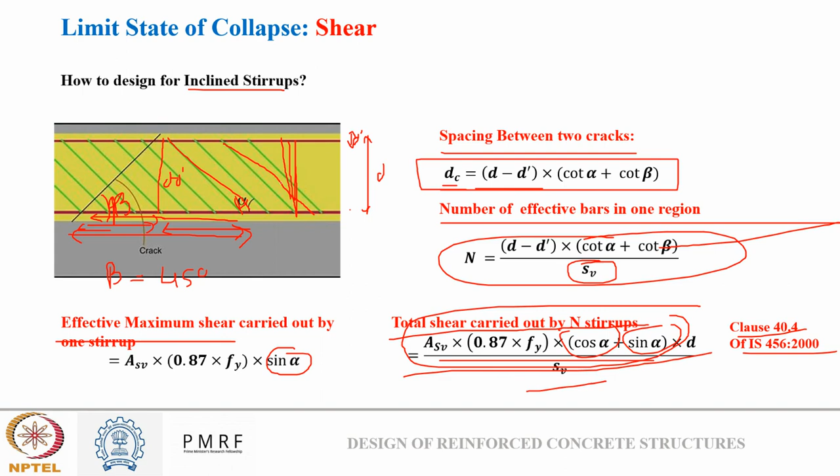Now equating this to actual shear that we need to resist, we can calculate the spacing between the stirrups for a known or assumed diameter of stirrups. Apart from this, suppose my depth of the section is varying.

So this was the last case that we saw in the NPTEL section. Suppose my depth of the section is varying, so how to calculate how much shear stress is acting at a particular section? This is a basic structural part. Suppose I have a cantilever beam in which there is some force acting here. Due to this force, how will my moment diagram look like?

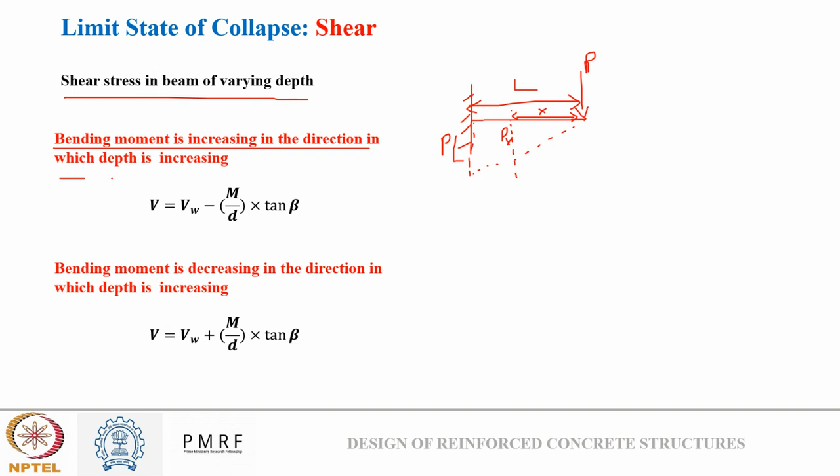Like this. Moment here will be PL if I assume this is the length. So we can say how we can calculate at any section what will be the moment, easily. Suppose this is X, so here moment will be Px. Now suppose first case is my bending moment is increasing in the direction of increasing depth. So suppose my beam is like this. This depth is D dash and this depth is D.

I'm showing this view only. My beam is like this. Here you can see the top view, I guess. You can say this is the top view or the side view, and this is one more side view. Suppose I want to calculate what is the shear force acting at this section. So how we can do it? By using this formula. Earlier we saw, we only said V is equal to Vw. Vw is nothing but P.

Okay, the shear force acting at the end. Now how the shear force is changing with the depth, that we can calculate using this formula.

So here tan beta is nothing but this angle beta. M will be moment at this section, and D is the depth of this section. Here my M will be 0, so my formula will become V is equal to Vw only.

But as the depth will increase, my shear force acting will decrease, which should occur. Similar is the case where my depth of the section is decreasing in the direction of increasing bending moment, so the plus sign will come in between. As the more will be the depth, less will be the shear force acting on the member.

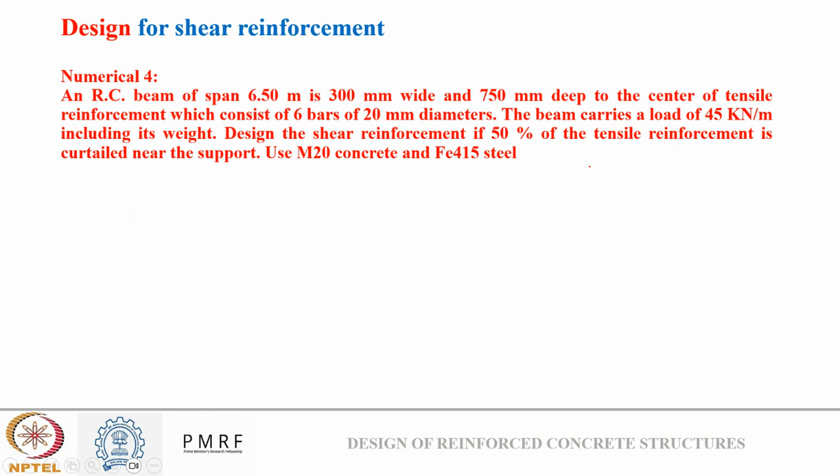So this is one more variation in which generally the design of shear reinforcement is asked. Just try it on your own, else I will tell the solution.

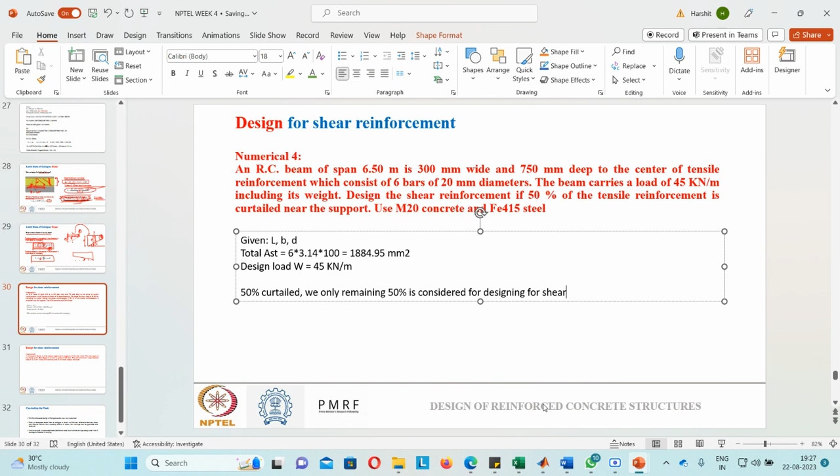So actually the area of steel that I have, AST dash, is 0.5 times 1884.95, so it is 942 mm square approximately. So this we know. So from AST you can get tau c, and from M20 you can get tau c max.

What we need to get right now is tau v, so we'll get tau v. Maximum shear force we can calculate since we know the load, so it is nothing but WL by 2. So it is 45 into 6.5 by 2, and it will come out to be 146.25 kilonewton.

So tau v is nothing but 146.25 into 1000 divided by BD, so 300 into 750. Okay, so this will come out to be 0.65 Newton per mm square. So we know tau v is this.

Tau c, when you will calculate, it will come out to be 0.27 Newton per mm square. And tau c max for M20 grade concrete, we know it is 1.8 Newton per mm square.

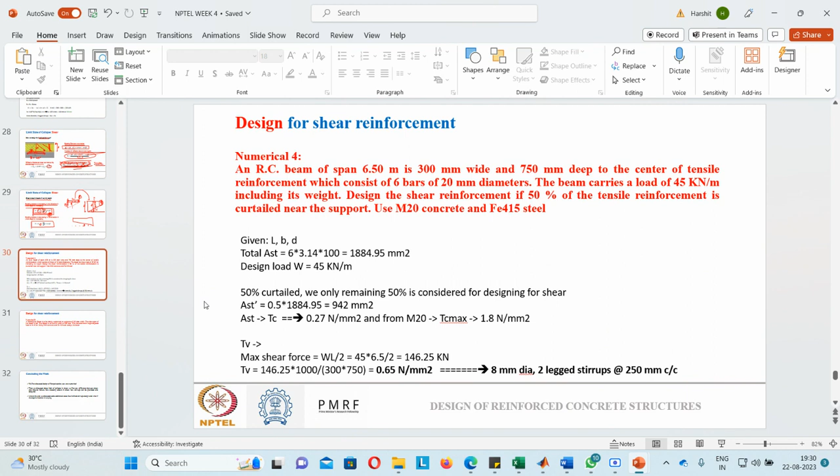Now just look at the last numerical.

So this is a complete design question for a reinforced concrete beam. Some part of this question we have seen in the last class also, in the last live session. If you remember, in week 3 of the live session, we saw the same question where we designed the beam for flexure only. So you need to proceed ahead with that part.

So what you need to do, I will quickly tell you what we discussed in the last class. We know the beam is simply supported on a width of 230 mm. Clear span is given, so we first calculated the effective span. The depth was not given, so we assumed 400. We calculated the effective span, it came out to be 6.23 m. Superimposed load was given, we calculated self load, so we got the total load. Then we calculated the factored load by multiplying by the factor of 1.5, and we calculated the bending moment. For the bending moment, we calculated the area of reinforcement bar required.

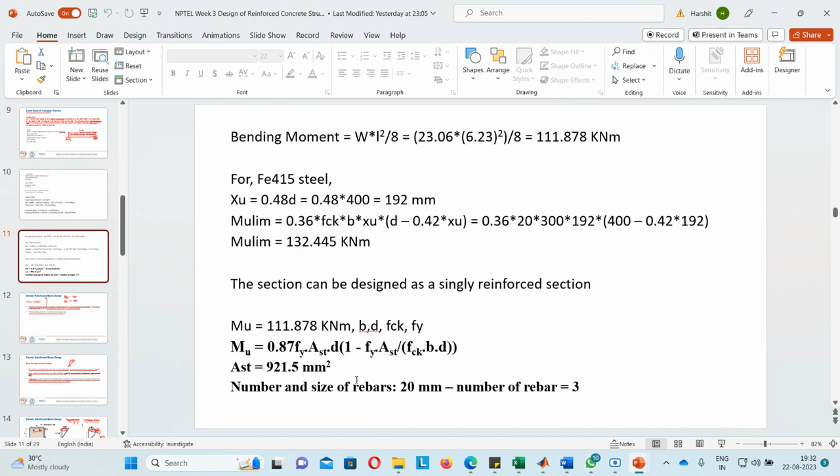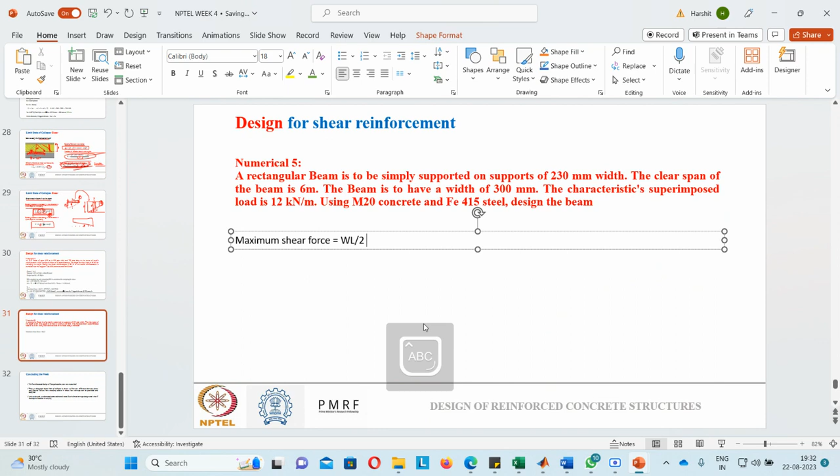Now in our question, for this factored load, we will also calculate the shear force. How will we calculate it? Maximum shear force we calculate as WL by 2. So what is the load that we got? 23.06 into L, 6.23, divided by 2. Just do the calculation. It will come out to be 71.832 kilonewton. So in the last class we saw the flexure design for this part. Now we'll see the shear design.

So nominal shear stress we can calculate. Nominal shear stress, tau V, is nothing but Vu upon bd. So Vu upon bd will come out to be 0.598 Newton per mm square.

Now we know percentage of reinforcement bar, it is nothing but AST into 100 upon BD. We know AST, we know B, we know D. So it will come out to be...